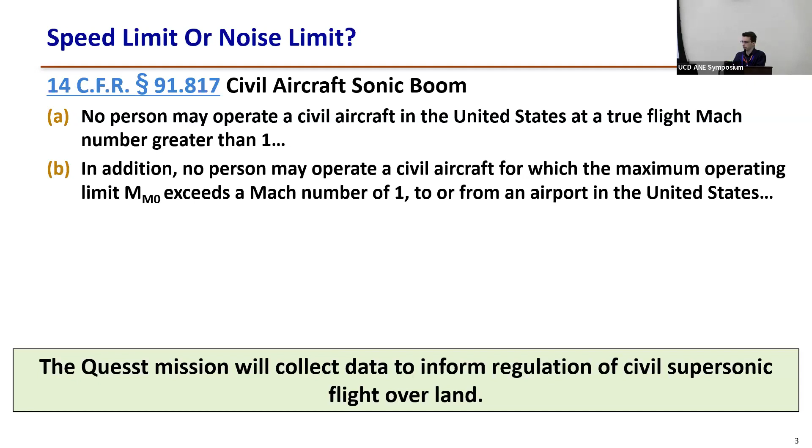In brief, the NASA Quesst mission has 3 phases. Phase 1 is about building and flying the X-59 aircraft. This is a one-of-a-kind demonstrator aircraft. The contract to build it was awarded to Lockheed Martin, and we actually expect the first flight of the X-59 later this year in 2023. Phase 1 is about building the aircraft and proving its flight worthiness to operate within the national airspace system.

Subsequently, in Phase 2, to be conducted starting in 2024, we're going to spend some time validating the acoustic tools that we are developing to measure a one-of-a-kind phenomenon, the quiet sonic boom, or as we like to call it, the sonic thump. So phase 2 is about proving the accuracy of the predictive tools.

And finally, phase 3, which is my focus at NASA and what I'll spend the rest of the time on, is about the conduct of community testing. We expect to overfly 4 to 6 communities in the nation to gather response data to the sonic thump, and ultimately deliver these data to noise regulators. And I'll identify who the regulators are in the next slide here.

Of course, regulatory authority in the United States belongs to the FAA. I'll point to Section 181 of the FAA Reauthorization Act, which exhorts the administrator to exercise leadership in the development of standards as they relate to prospective supersonic flights, and to work with national and international stakeholders as well.

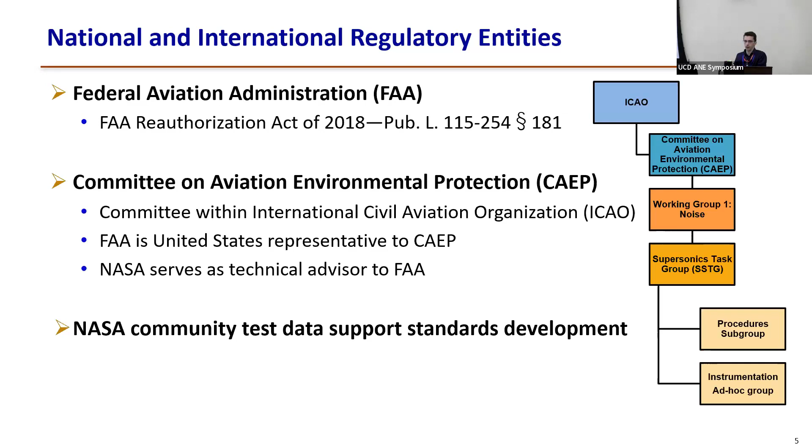I do want to emphasize once again, though, the purpose of our mission is really to collect a body of data that can inform the standards that will be discussed and agreed upon by the FAA and the regulatory bodies at CAEP.

So let's go ahead and meet the noise source. We're excited about the X-59 demonstrator aircraft and some of the properties that it has. It's been developed to have an acoustic signature and energetic characteristics like prospective future commercial supersonic transports.

Here you see noise levels on a perceived level metric scale in decibels, and we can compare that to some other known phenomena to get a sense of what kind of reduction in noise future transports might have.

Compared to the Concorde, which had a 105 decibel perceived level noise, the X-59 is designed to deliver noise levels around 75 decibels, with some variation in that range. Compared to a thunderclap or a car door slam inside a car, which could be very startling, the X-59 may have properties that are a little more tolerable, a little less startling to communities as it flies overhead.

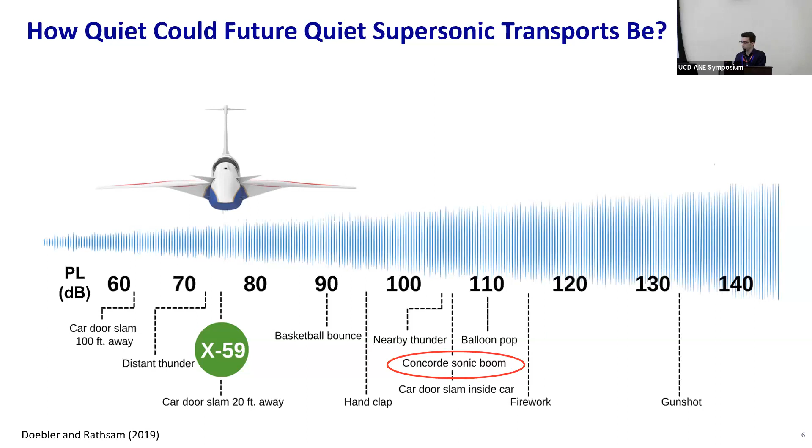Related to the scope of the Quesst mission, I want to be very clear about what we think we will produce, and no less importantly, what's out of scope for the mission. Our intentions here are to produce nationally representative dose response curves.

You see kind of a cartoon of what that might be on the right-hand side here. In particular, we're interested in two phenomena: the annoyance that is a result of any single flyover, as well as the cumulative behavior—how people respond to multiple flights per day.

Additionally, we'll ask survey questions that will help us capture some of the effects of other things that might attenuate or increase annoyance. In particular, we'll be asking about the presence or absence of rattle, vibration, or startle that the survey participant experienced, as well as gather some information about their listening environment.

Were you at home, at work? Were you indoors or outdoors? Were your windows open when you were indoors? And we'll be able to vary doses within the waking hours of the day in particular, so we will have at least a little bit of variation with respect to time of day.

But I do want to highlight that a few things are out of scope for the mission. In particular, we won't be assessing the effects of sleep disturbance, and we won't be conducting overnight flights. In part, this is a safety consideration with our one and only X-59 aircraft.

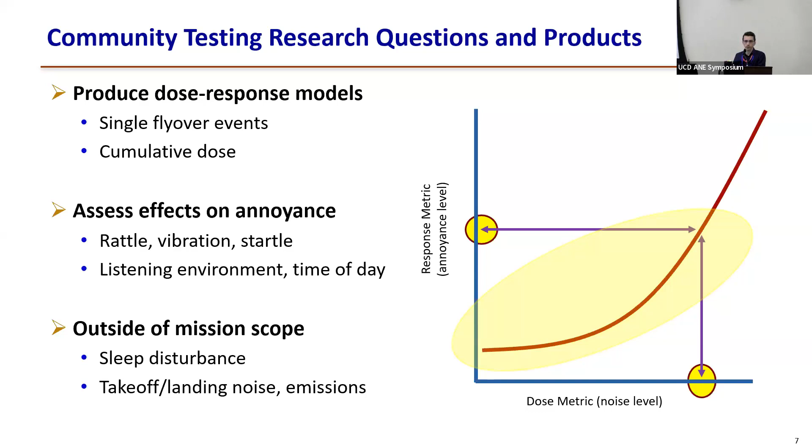Also, we won't be focusing on gathering data for takeoff and landing noise, and we won't be focusing specifically on high altitude emissions with the Quesst mission. However, I will highlight that other parts of NASA are actively researching these things and supporting research in these areas.

If you look to the top figure there, you see an example of what we call the poster, or the potential sonic thump exposure region, and you get some idea of what a notional flight path might be. The gray arrow indicates the straight line supersonic cruise, and the blue return arrow indicates kind of a subsonic loiter.

If the X-59 makes an additional pass over the area, you see distinct regions for acceleration onto condition and deceleration. Right there in the middle is where we believe we'll be able to effectively measure or estimate the resulting sonic thump, and it's in that area that we draw our sample for this study.

NASA intends to conduct 4 to 6 community overflights starting in 2025 and operating through 2027. I can announce that the first airfield has been chosen—specifically, that's going to be in the vicinity of NASA Armstrong and Edwards Air Force Base, the purple dot you see in Southern California. Future airfields are to be determined.

The community to be tested will be somewhere within a 100-mile radius of the chosen airfield, and we have some pretty extraordinary constraints that dictate where we could conceivably conduct these community overflights.

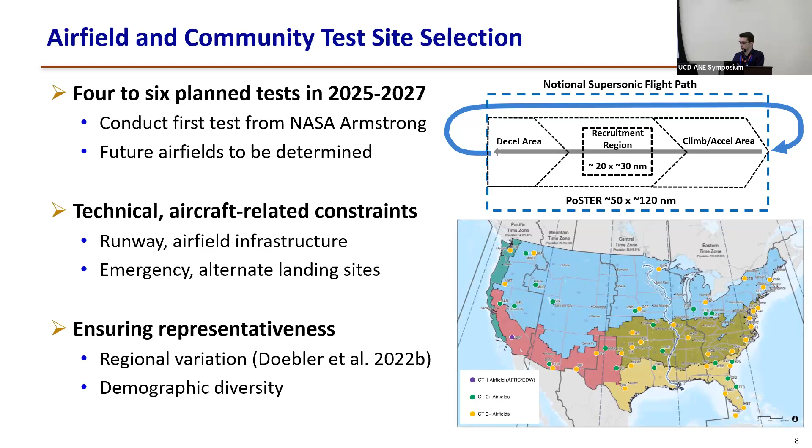Likewise, we're dealing with the communities present at these test sites. Judicious choice of test site also goes some way into building in the demographic diversity that we want in a nationally representative data set.

Nobody blink here for a second.

I'll summarize some of the activity around our noise exposure design, estimation, and analysis. First, we've come to understand more about the ranges we anticipate producing with the X-59. Our nominal doses should range between 70 and 87 decibels on the PL scale.

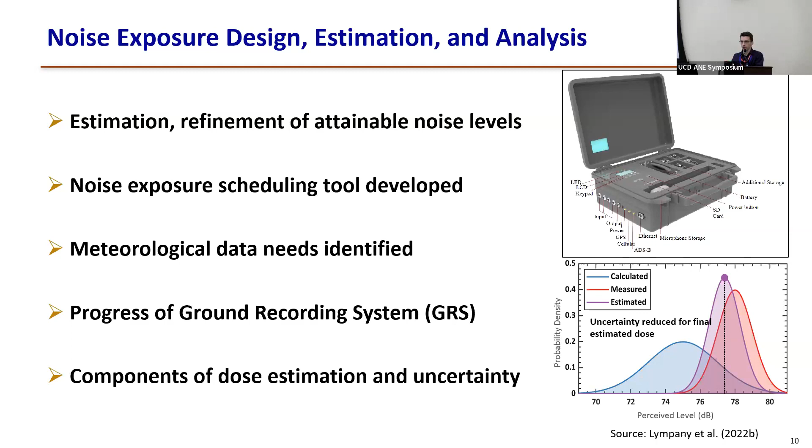You can see the notional diagram up there on top. We have a strategy for combining predicted noise models with actual measured estimates, deploying something like 100 recording units across that large testing area. The combination of prediction with measurement will become our dose estimate.

I'm nearing the end of my time, so I want to highlight what we think we might see based on some early testing done in the vicinity of Galveston. This was done using an F-18 aircraft and a special dive maneuver that simulates the phenomenon of a quiet sonic boom.

The data came from 5,000 records from 371 unique survey participants. Annoyance was a fairly rare event, even among a group of participants who agreed to take the survey and knew testing was occurring. In fact, in 56% of those cases, they indicated they couldn't hear the event in question. More detail is available in the contractor reports, as well as one of the academic papers by Lee.

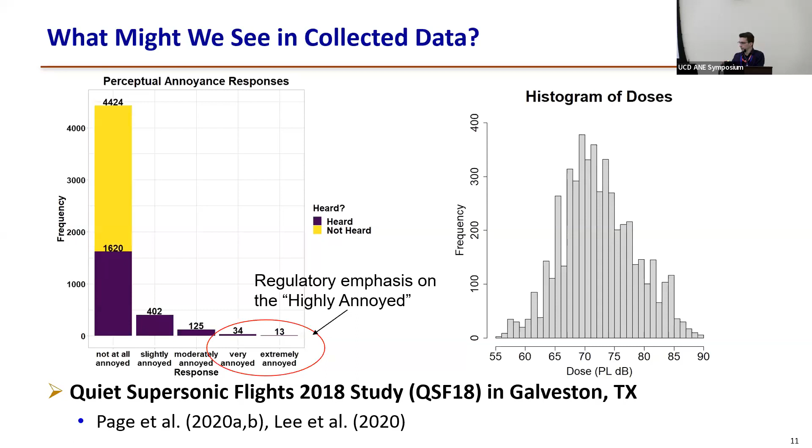It's been a long time in the making getting to the Quest mission. In fact, one of the earliest risk reduction studies was done in 2011 in the vicinity of Edwards Air Force Base, again using the F-18 aircraft.

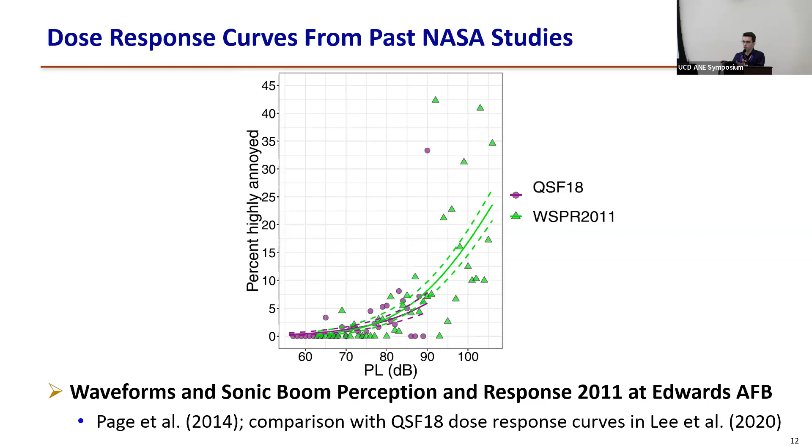Here you see two dose response curves from two different communities using the same aircraft and the same maneuvers. You can find more details in the contract report and again in Jasmine Lee's 2020 paper. I'll highlight that at the highest ends of the QSF-18 dose range, there's about a 2 percentage point difference in annoyance—so while they are similar, they're not exactly the same.

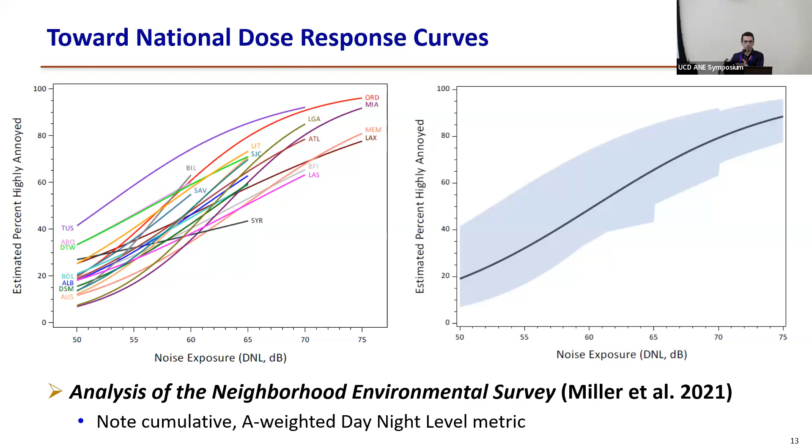By way of analogy, we've seen the FAA Neighborhood Environmental Survey combine results from 20 different airport neighborhoods to produce one national dose response curve. This will be similar to our objectives with the Quest mission and community testing—combining data from 4 to 6 different communities to produce a nationally representative dose response curve. I'll highlight that the noise metric in question is different; we'll be considering impulse noise rather than the cumulative metric. But the fact remains that we'll be seeking ways to combine data from multiple communities that we overfly.

And just to conclude, I've given you a whirlwind tour of the Quest mission and its intentions to conduct community overflights with the X-59 aircraft. We expect the first flight later this year, and we'll begin the community testing in earnest in 2025. And the fundamental research question that we're trying to ask is, should that speed limit on supersonic flight over land be replaced with a noise-based limit, and at what limits? Thank you.

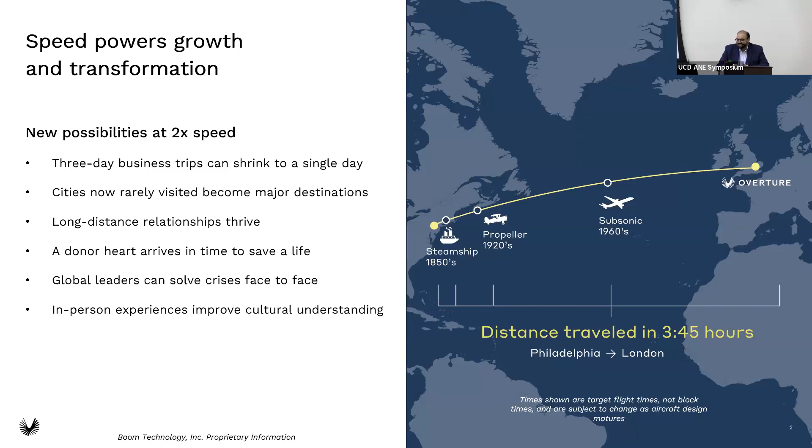And so at Boom, we see new possibilities by making further advancements into the speed of travel. So definitely increase productivity in terms of business trips, unlocking cities that were maybe a once in 3 year, once in 4 year destination can now become more accessible. And I think fundamentally we believe that life happens in person, and so long distance relationships are facilitated. Certainly have a lot of other medical related benefits, geopolitical benefits, so on and so forth.

And so Overture is the main product that Boom is developing. It's the world's fastest airliner. And I think the top tagline there is something that I'm really proud about and passionate about, both myself and others in the company. So it's optimized for speed, safety, and you'll note sustainability, which I think is baked into the very core of how we operate as a company.

So a little bit of facts about the aircraft that we're developing. It's a Mach 1.7 aircraft. It's roughly twice the speed of current commercial transport aircraft. A capability of carrying 65 to 80 passengers, 4,250 nautical miles.

And a little bit about the other aspect of sustainability here, which is on climate impacts. We are designing both the aircraft and the engine, so the entire system, to be able to run on 100% SAF. And you can see there are some of the design features here that leverage advancements in vehicle design and development capabilities that have been unlocked over the years for us to be able to increase the efficiency of the aircraft.

Introduce you to Symphony, which is our engine program for Overture. Again, efficiency and sustainability are key drivers here. The focus is on making it affordable for operators to operate the aircraft, but also, you'll see here, a very strong focus on the noise impact.

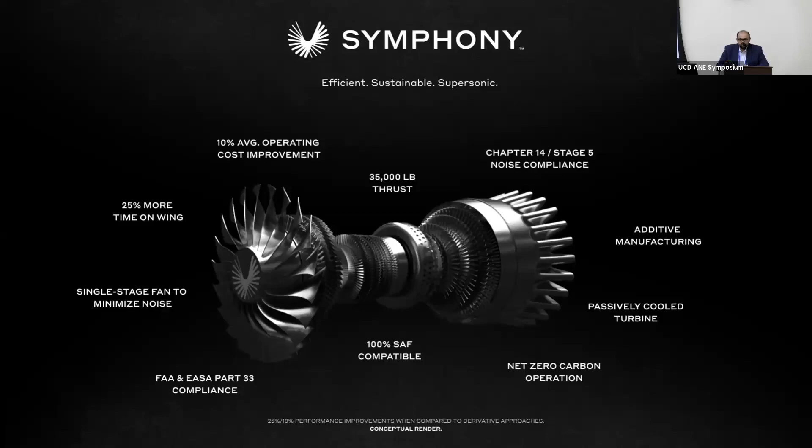So we want to start out by at least meeting what's the state of the art as of today. From here, I'm hoping to share more about our design philosophy and ways that we are designing Overture to meet these LTO noise levels. Like I said, we are committed to ensuring that the aircraft and engine combination achieves Chapter 14 levels.

We do have a unique challenge here, though. Traditionally for subsonic aircraft development, specifically looking at the engines, one of the more direct ways to reduce LTO noise is to increase the bypass ratio, deriving more of the thrust from the fan rather than the core of the engine.

That means that as a design constraint, we are looking at medium bypass ratio engines. The flip side is that relative to current technology and the way aircraft are currently operated, those engines, because you're deriving more thrust from the core, have a higher core velocity and therefore higher jet noise from the engine.

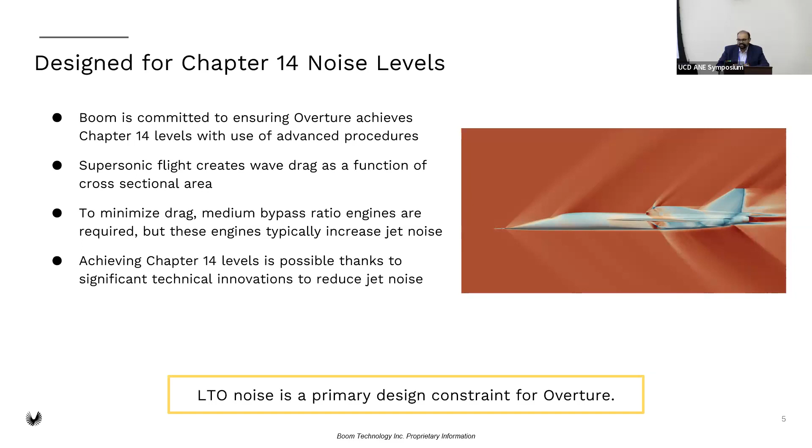So I mentioned before, we are targeting Chapter 14 levels, and there have been a number of innovations that we've had to implement and pioneer to achieve that. That's what I'll share with you on the next chart. Three buckets here: engine cycle, advanced procedures, and design of the aircraft and engine.

When we talk about the engine cycle, I mentioned jet noise is one of the big drivers. A design constraint for us is to ensure that the exhaust Mach, or exhaust jet velocity, has a cap to it, and to make sure that's subsonic, so that we eliminate a lot of the supersonic shock cell noise just from the jet.

I'll get to the advanced procedures in just a bit, but just to touch on the third point, it goes through some of the design characteristics baked into the aircraft and engine. We're doing a lot of work evaluating different nozzle and inlet configurations to minimize some of the tonal frequencies and such.

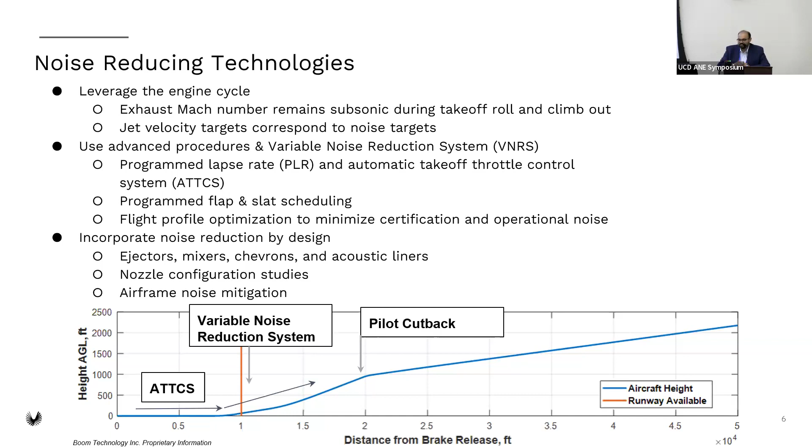We are at the design development stage of the aircraft. I forgot to mention this previously, but our first flight is anticipated to be in 2027, with certification by the end of the decade. At this stage of aircraft development, we have a whole bunch of models and software used to calculate both the aircraft performance as well as the aeroacoustics. Those have to be validated against something in order for us to have confidence that the aircraft is doing what we expect it to do, and to increase confidence in the validity of our simulation.

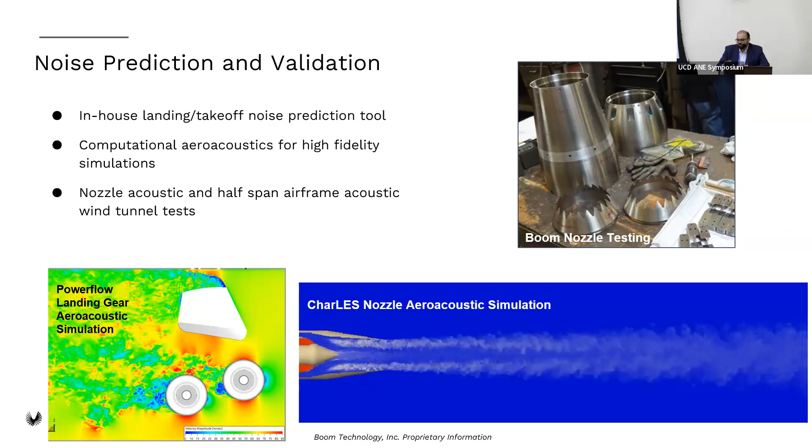Finally, a quick note on our overflight or sonic boom impact. Our business case, Overture's business case, is really looking at transoceanic routes. From our calculations, we see that the market is ripe for more than 600 routes that are viable for supersonic transport. So what we are very mindful of, and it's baked in right from the start, is to respect, as Dr. Cruz mentioned, the overland speed limit, notably eliminating sonic boom impacts to communities over land.

There's a good amount of effort within the company to develop fleet planning and route optimization tools, which of course have the objective to get from point A to B, but to do so in a way that minimizes the amount of fuel required, while also ensuring that sonic boom impacts, both the primary boom as well as things reflected off of the atmosphere, do not impact land masses at all.

Just to wrap up, even though Overture is still in the design development stage at this point, sustainability is a key thread that runs through the company. Noise is one of the most critical design drivers that goes into the decisions we make for designing the aircraft. The goal is to be able to achieve Chapter 14 noise levels through these innovations that I've just covered.

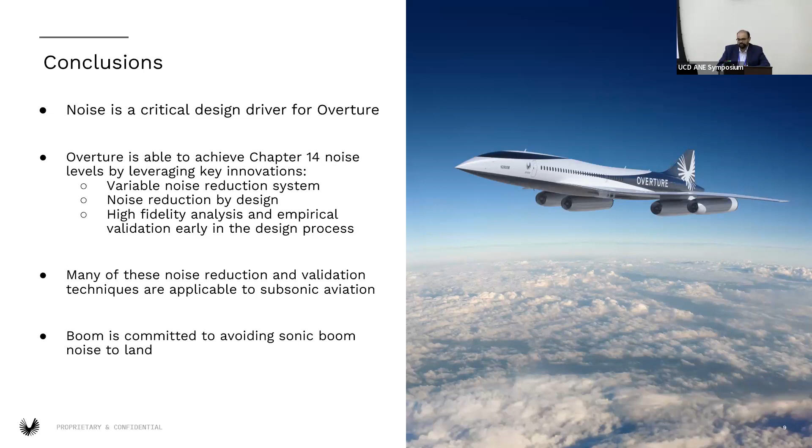One of the key things we hope the contribution is not just for Overture, but more broadly, is that there appears to be good viability for some of these technologies to also be applied to subsonic aircraft. And finally, as I mentioned, the sonic boom impact is something we are very firm about—not having any impacts on the land or to land masses. So that concludes it. Thank you for your time and allowing me to share a little bit with you guys.

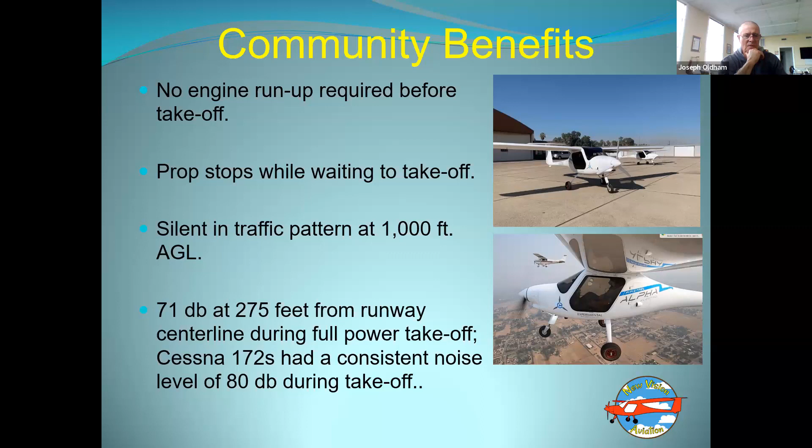The primary source of that noise is the propeller. As it spins, it produces a noise signature as it cuts through the air, and that's where you get most of the noise. The actual electric motor just makes a kind of whirring sound. From the ground, most of the time people have noted they sound like very, very quiet little turbines taking off.

So the crew benefits: noise levels in the cabin are low enough that you can actually remove your headset and talk without having to yell or scream at each other, which is really cool. They are very smooth, and flight inside an electric airplane is extremely relaxing.

I had to do 100 hours of endurance testing on one of these aircraft, doing a lot of back-to-back flights over a period of a few months. Oftentimes it would get so relaxing up there that I'd think, oh my gosh, I might fall asleep up here, this is not good. So they are a very relaxing environment to be in for the crew.

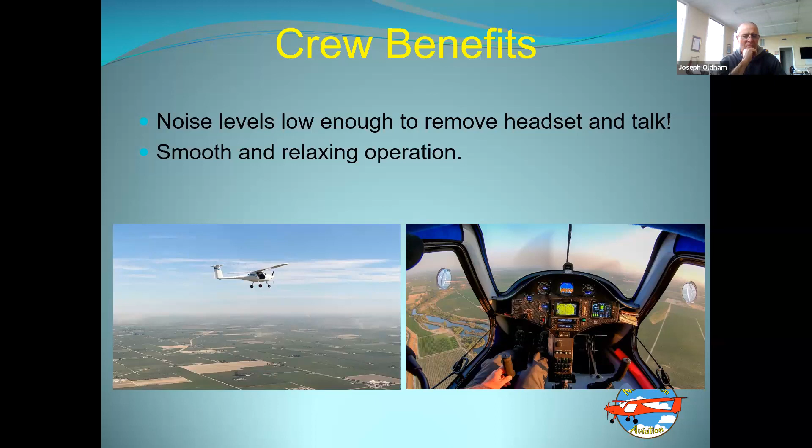Some of the potential risks, though, are if people around airports are used to hearing engines and used to hearing aircraft as they move. Because electric aircraft do not produce any initial noise at startup, it can be a hazard to people that want to walk up to the airplane, maybe not thinking that the aircraft is occupied or that it's getting ready to start.

The Alpha Electro actually has a special switch for the prop, for the throttle. If you activate the throttle switch and the throttle is actually moved off of its zero position, the prop will not turn. You actually have to move the throttle back to the shutdown detent and then move it ahead for the prop to actually turn.

We set up some procedures where we basically turn all of the lighting on before we start the aircraft, and then of course we announce that we're about to start, clear prop before you start to move, and that seems to have been working out just fine.

People on the ramp areas, however, may not hear you as the plane is even taxiing. They are that quiet. So the pilot needs to be very aware that the aircraft is very quiet and take appropriate precautions. If you see somebody walking or moving that might not understand that the aircraft is there, you basically want to just shut it down and let it coast, and be as cautious as you possibly can with people out on the ramp area.

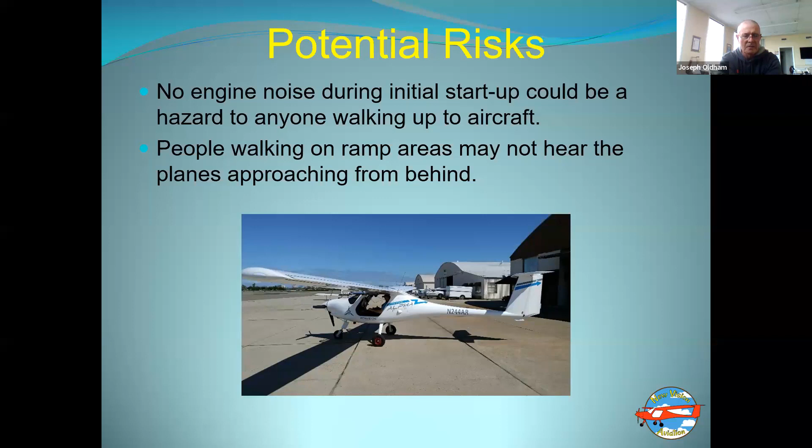So with that, if there's any questions, I'll answer those later on.

Great. Thank you, Joseph. It was great to have a GA perspective on our panel.

And I would like to introduce our final speaker and the final speaker of the conference, the coveted spot that Ben Goldman has. He's the manager of acoustics at Archer. Ben began his career with Bell Helicopter, where he spent 5 years improving their acoustical prediction methods, as well as learning field test and civil certification procedures. Prior to joining Archer, Ben spent 2 years at Joby Aviation, leading the aeroacoustic design of their vehicle. His current responsibilities include leading design of the cabin and external noise profiles for Archer's production vehicle, Midnight. Ben holds a bachelor's degree in aerospace engineering from Purdue University and a master's degree in aerospace engineering with a focus on aeroacoustics from the Pennsylvania State University, where he studied under Kenneth Brentner. Please help me welcome Ben Goldman.

So today I will be talking about designing urban air mobility for low noise. Let's get started. Who we are - like I said, I was a little surprised you guys know who we are, but for those of you who don't, we have now designed and we are manufacturing a safe, sustainable, low noise, all electric vertical takeoff and landing aircraft, with the goal of being first to market in 2025. There's a lot of adjectives in that statement. The big one to start with is the all electric vertical takeoff and landing, which we shorten to eVTOL. I'll use that term probably a couple of times through the rest of the talk, but that's the one to familiarize yourself with. I'll cover the rest of them as we go.

All right, so the first part, the eVTOL, electric. It is the advancement of electrification that has enabled this technology first and foremost. We have seen tremendous growth in the specific energy density of batteries over the last 30, 40 years. In particular, in the last few years alone, we have reached a so-called magic number of about 250 watt hours per kilogram, which basically enables this technology to be a viable business model. The other way to consider that, though, is that we have only just reached the point of market viability. So we are at a razor's edge of having a product that will actually make a profit. We need to be keenly focused on actually making a product that is efficient, that will allow us to make money and profit as a business.

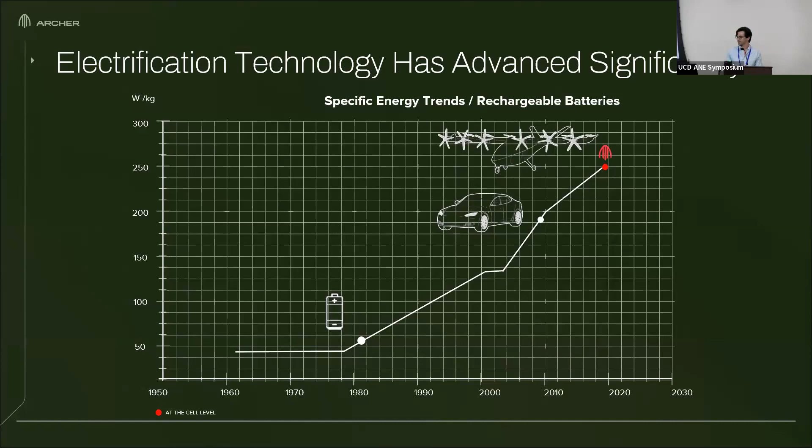So a little overview, Archer UAM, this is the urban air mobility concept as we are building it out. We plan to move people less than 100 miles within and around city centers.

The early launch markets, you may have heard a couple of the announcements thus far, New York, Chicago, LA, Miami - largely congested areas that are dealing with high throughput and need solutions for these high congestion areas.

The early launch routes will be these trunk routes, basically the main routes that go from airport to city center. There's already an existing demand and a willingness to pay. I can add that there is also, to some extent, an acceptance of the noise as a status quo, so there won't necessarily be such a strong pushback to introduce this vehicle.

So the first phase is expected to rely on existing and retrofitted infrastructure, and we then plan to expand out based on aligning with development partners to build higher throughput vertiports.

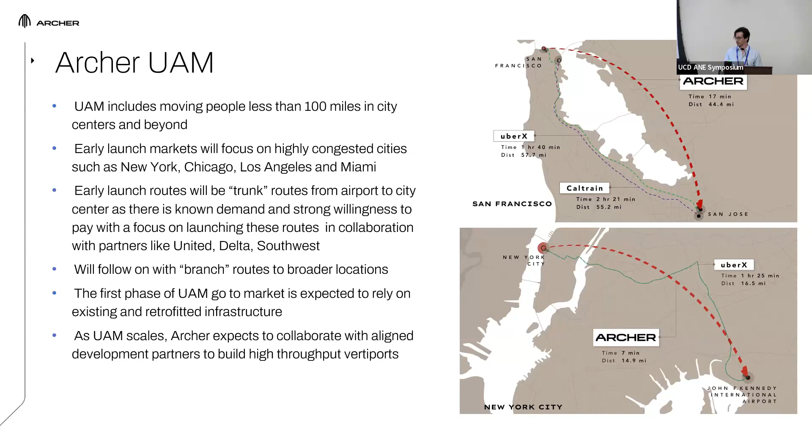So the aircraft that we have designed, as an overview - I mentioned it is electric, it is vertical takeoff and landing. In terms of performance, we are planning a range of up to 100 miles, but it is optimized specifically for 20 to 50 mile rapid back-to-back trips with minimal charge time.

Speeds of up to about 150 miles an hour and payloads of about 1,000 pounds, so a 1+4: pilot plus 4 passengers with room for golf bags.

The advantages: safety first and foremost, that's our primary concern. The vehicle as a whole will be certified at levels similar to today's commercial airliners, but distinct from helicopters, there are no single points of failure. The distributed electric propulsion systems we are using, having multiple propulsors on the vehicle, means that any one of them failing doesn't mean the vehicle is coming down.

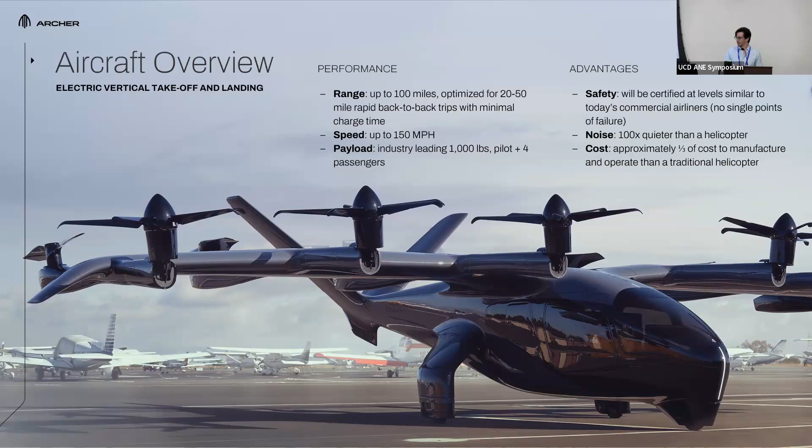In terms of noise, we are stating about 100 times quieter than a helicopter on average. We are not yet ready to put precise numbers to that, but on order we are about 20 dB quieter than a helicopter - more so up on wing, we're quite a bit quieter by 20 dB. And in terms of cost, we are about one-third of the cost to manufacture and operate relative to a helicopter.

All right, so let's get into some of the design of the vehicle itself. There's a whole slew of factors that go into the design. Any one division, any one group is going to say that theirs is important, but it's a huge design space, so where do you get started?

What I alluded to in one of the first slides was electrification enabling this technology, but as I said, it has also only just enabled this technology. So the really limiting thing, the thing we need to focus on first, is the performance, because that's the only thing that if it fails means we will not have a viable product.

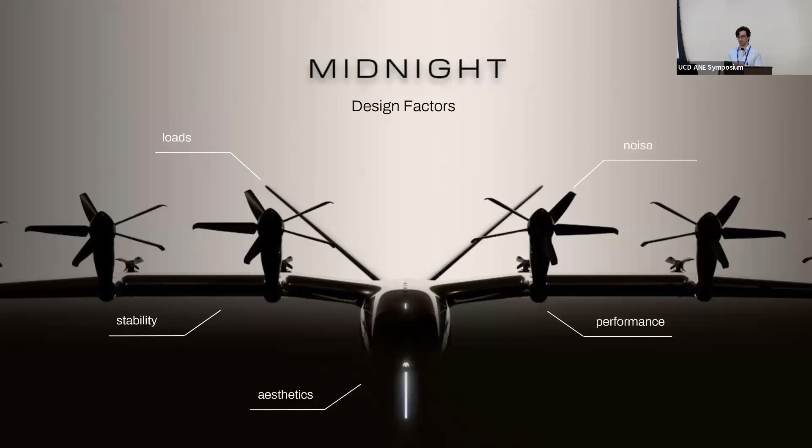So let's ask ourselves this question: which one is more efficient, thrust-borne or wing-borne flight? I don't know why there was a second image that came up - it's too bad, it's supposed to be a little helicopter right here. All right, well anyway, let's imagine there's a helicopter under that first equation.

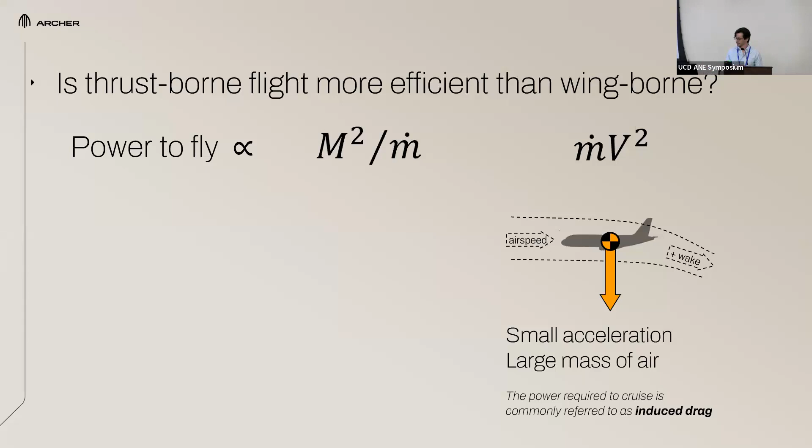The idea is basically it's an inverse relation between the two concepts. One has a large acceleration of a relatively small amount of air. In the case of wing-borne flight, you have a small acceleration for a large mass of air. Oh, there it is, all right.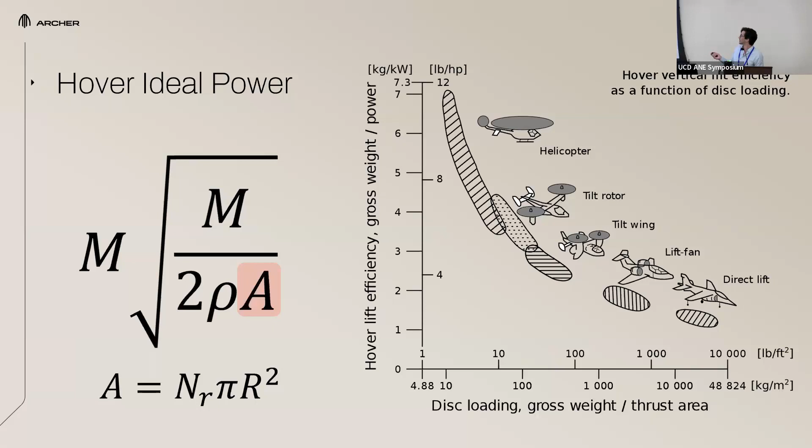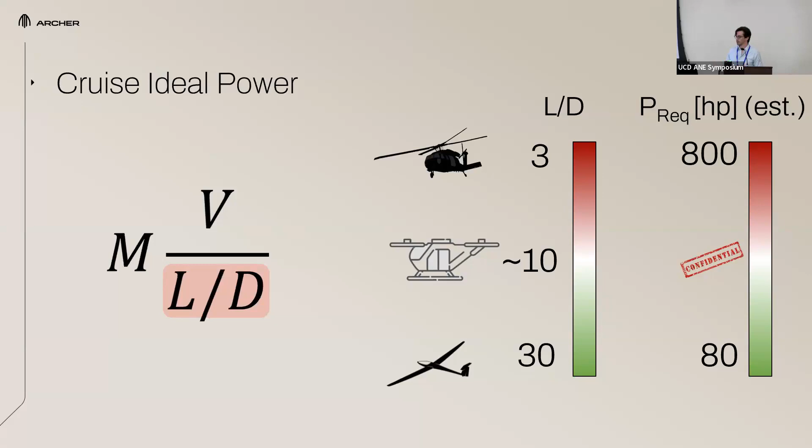So the vehicle we are designing will cut kind of in the middle of that. We will have a higher performance ratio than that of a helicopter and a lower performance than that of a glider. What that means in summary is that we are taking the best of both worlds. We have hover performance that is nearly as good as a helicopter. We have cruise performance that is better than a helicopter, matching that of most wing-borne systems. And we should note that the majority of the time the vehicle is operating is wing-borne. We're only considering these vertical maneuvers for a very short period of the mission. So it would behoove us to use a lower cruise power. So that's why we have a wing-borne concept.

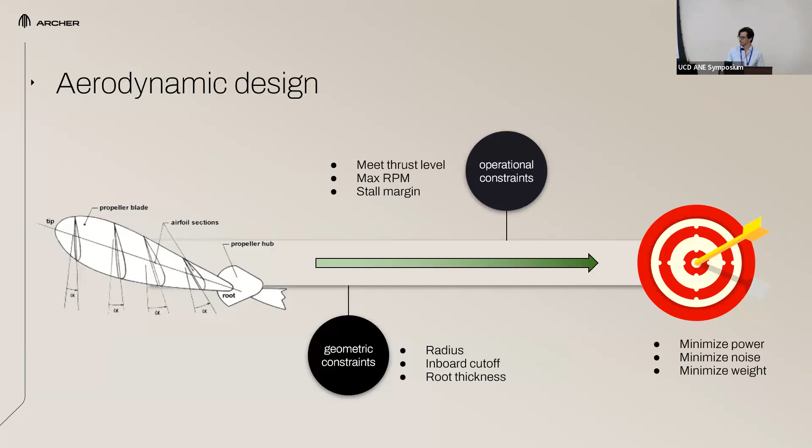So we are simply looking at aerodynamic designs that also help to reduce the noise and meet our performance requirements. In terms of design tools, our aero and acoustics teams have built a modular framework to support these multidisciplinary predictions. So we've grouped together our CAD for design, structural sizing, CFD, and noise all together. This allows us to create a product that is truly fully optimized for the mission.

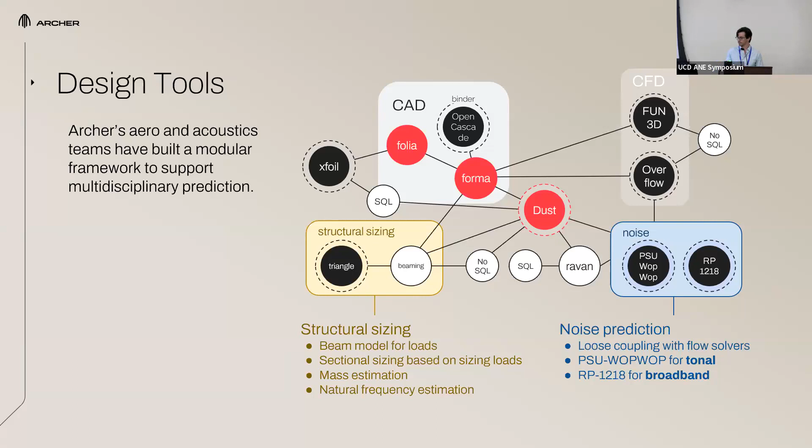The lifter, on the other hand, which is just intended to support us for vertical takeoff and landing, does also have variable RPM, but it is just fixed pitch. It will stop in cruise and stow at a low drag configuration, and is quite simple.

Acoustic considerations that went into these propellers, particularly on the tilter: low tip speeds, that is absolutely critical. That's the first order effect, that's what gets the overall noise levels down. But then we also need to consider the advance ratios, the transitions, and the edgewise flight. So we also need to account for low advance ratios in transition and cruise. What this does is prevent the onset of this typical wop-wop sound that you hear from a periodic change in the loading as you get edgewise flight typical of a rotor.

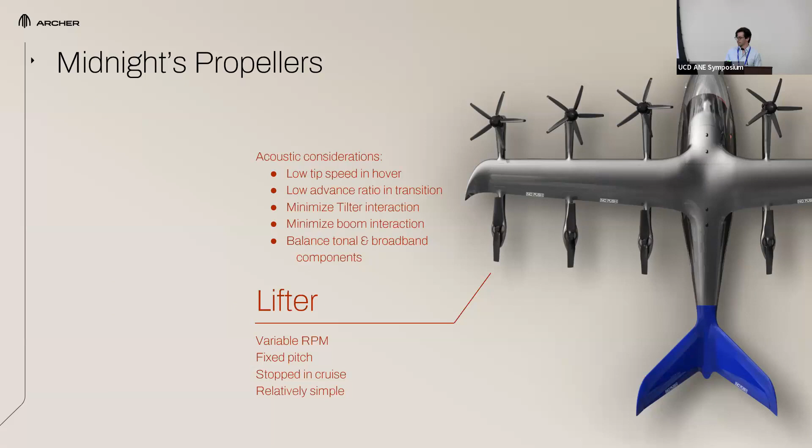So what I've talked about is ways that we can minimize the noise of the propellers, minimize the noise of the vehicle. And the next step, of course, layers of the onion, is ways to minimize the community noise. So we, as a first order, reduce the impact by optimizing these trajectories.

So we take the very same framework that we have in terms of aeroacoustics, our aerodynamics and acoustic tool chain. We wrap into that our Volpe advanced acoustic model, which allows us to generate noise contours on the ground. This can then be utilized for multiple purposes. We have an operations and business case simulation framework that allows us to design our business models, understand what markets we want to go into, how we design the routes, how we plan the business case.

And then we also have an optimization loop that we can now add, because once we have these contours, once we know the contour areas, we can then feed that back into our system, understand what trajectories are giving us the highest noise, lowest noise, and optimize thusly.

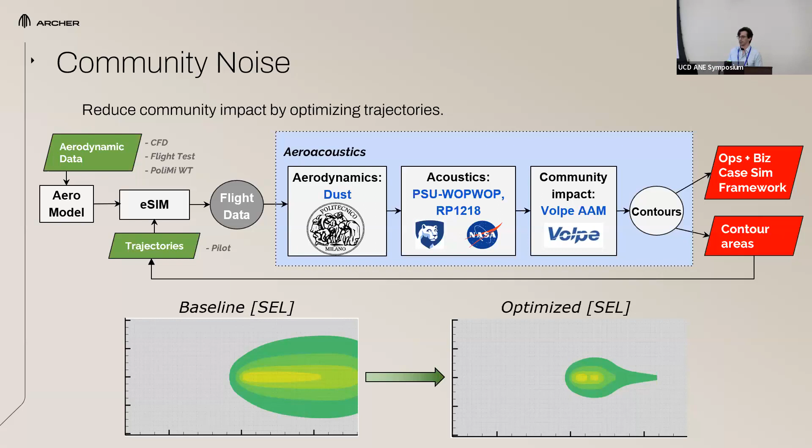And lastly, noise abatement still applies. I don't mean to dig on Teslas, it was just easy access, but in general, electric cars are very quiet. But when you drive them aggressively, in the case of plaid mode, which is like my favorite thing with Teslas, they're much louder, right? So there's no idiot-proof solution.

You can design something to be quiet, and then you can still operate it in a loud manner. So it is still very important for us, both as designers of the vehicle and those responsible to train the pilots, to understand that noise abatement is still an important part of the operation of the vehicle and how we interact with the public. So fly neighborly. And with that, I end with 26 seconds.